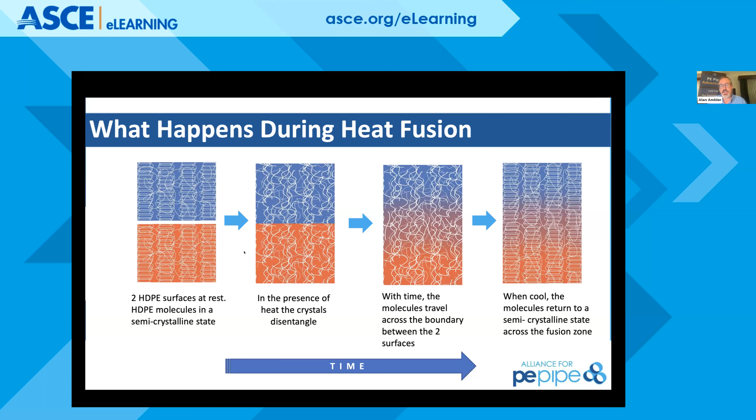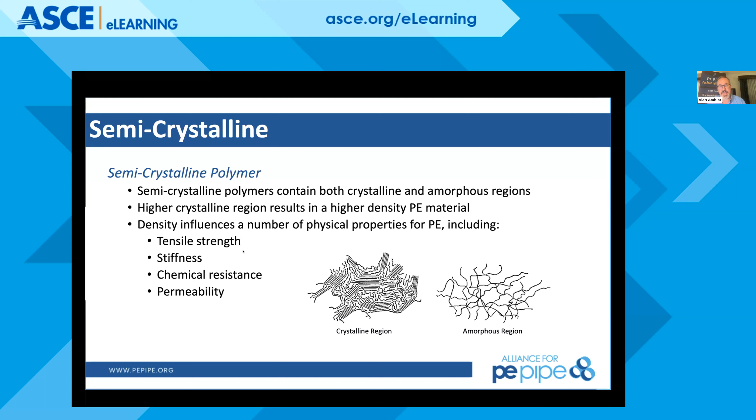That is unique to polyethylene in itself. Two regions I had mentioned before are the semi-crystalline and the amorphous region. Those two work together to bring us the density we need to give us a high pressure rating, to resist occasional and recurring surge pressures. It also gives us that amorphous region, which basically keeps all these parts and components together and really allows us that viscoelastic behavior to work with it in the field.

That's defined by two things: creep, or deformation of the actual material, and stress relaxation. Creep comes when we actually deform the material. High density polyethylene has high limits of deformation, but what we're seeing is once that stress is actually relieved from that point, then that pipe relaxes.

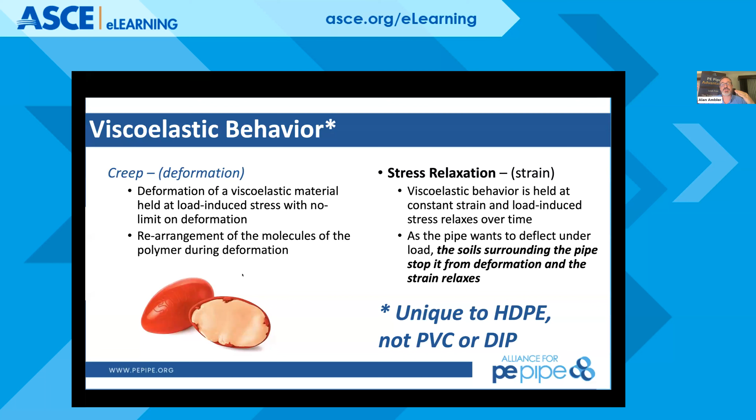That's why we can actually field bend this pipe in many instances. Once it's got a new shape as to what we're seeing, then we release that stress, and then that pipe thinks it's a happy pipe.

As you're seeing in some of these videos and pictures, the one on the bottom right happens to be a temporary condition where we are temporarily raising and elevating that pipe to get it aligned to go into an excavation or pipe bursting process. Once that pipe is installed, it relaxes and it's installed as a very happy pipe.

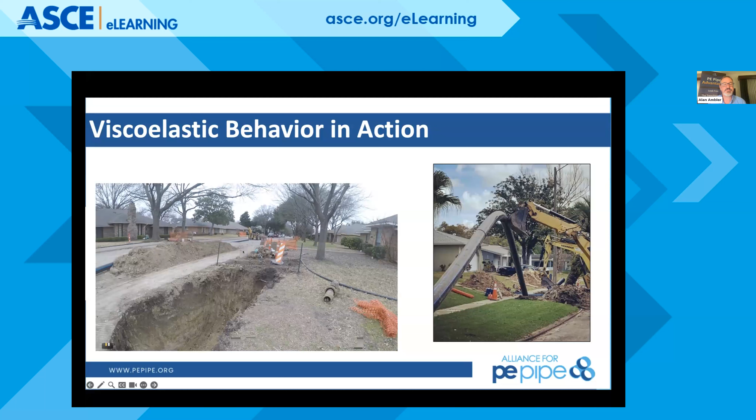So we want to look at main lines and open cuts. AWWA provides us an M55 design window. What that does is, if we stay within a 2 to 25 feet depth of installation, and we are DR7 through a DR21 pipe, you don't have to do any calculations whatsoever.

The video you're going to see now has all those things we want to see in a trench: a foundation, and a bedding that's a soft place to put the pipe down on. Then, though you won't see it in the video, they compact around that pipe as we go through.

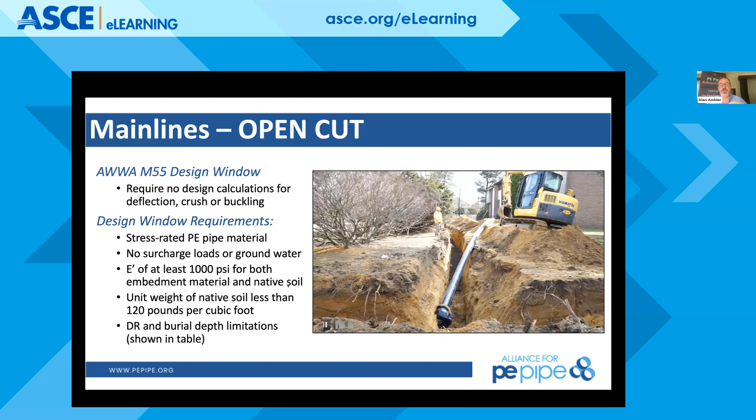This is one of the productivity benefits we see with long installation methods and open cut: we don't have to have people in the trench to work on that pipe as we go through, and we can take advantage of long laydown areas, or long installation areas, for higher productivity.

Horizontal directional drill is often a very common way for someone's first introduction to high density polyethylene. It's done in one of the most challenging conditions in which we're going to see HDPE installed. Oftentimes we're trying to clear an obstruction, either a riverbed, water body, or something of that nature.

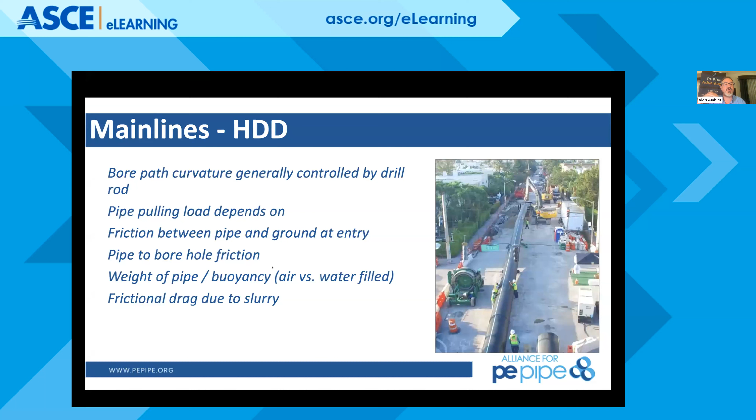In which case we go underneath that obstruction in a clear path, researching and designing that path as we come through. High density polyethylene allows us greater tensile force in order to resist the friction forces along that pull path as we go through and come out the other side successfully. That viscoelastic behavior again permeates all of this action as we're pulling this pipe into place.

Pipe bursting is another situation and trenchless design that really helps us to be able to eliminate more excavation as we go through.

We can all, as a trenchless family, go 85% less excavation. In pipe bursting, we're taking advantage of an existing conduit location. We know that it's free and clear of third-party utilities. We're able to come through and fracture that existing pipe. That existing pipe stays within the 2 to 3 inches of soil surrounding the replacement pipe, and now we're getting that production run as we come through.

We're limited in pipe length ranges by either valve to valve spacing in potable water distribution systems, or manhole to manhole spacing in gravity sewer systems, as we see there. So there are some limitations to the technology, but once we understand what those are, we can ensure productivity as it goes through.

Slip lining is another method. When we cannot fracture that existing pipe through pipe bursting, then we can pull in slip lining. So we need to access the pipe, and make sure that it's clear and free of any tuberculation or anything that might obstruct that gives us a nice avenue to be able to pull that pipe in.

Now, this is a replacement or rehab technology that reduces the ID of the existing pipe, so we can't put back something larger than that existing pipe. Pipe bursting is the only trenchless rehabilitation method that can replace with a larger OD than the existing pipeline. But in many instances, slip lining really helps when we have long runs and larger pipe, more of a transmission application.

Compressive fit slip lining is a very unique application for high density polyethylene, as we are temporarily reducing the OD of the production pipeline by pulling it through a die reducer. So we are pulling this HDPE pipe through that die reducer, and you're seeing here, once it gets to it, we're reducing the OD of that pipe, pulling it into place.

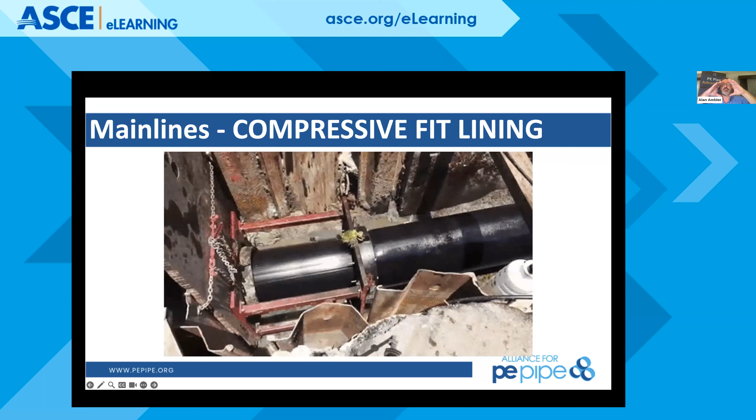Then when we're done with the pull, we allow it to relax, and it'll come back and retain its shape from the existing condition. So it'll push up forcibly against that existing pipeline as we go through. Compressive fit slip lining only uses high density polyethylene pipe, and it's a very cool technology to be able to maximize that ID as we've gone through.

So here's valves. One of the things I'd like to talk about, and Rusty, come on in if you want to talk through valves and available things that Core and Main might have. What you're seeing on the bottom right happens to be an MJ adapter.

Fusion in itself needs dry conditions. So if we have a repair or something that doesn't give us a dry condition, or there's just moisture we can't really get rid of within the trench from dewatering or over excavation stabilizing, that's where we would use this MJ adapter to make that connection.

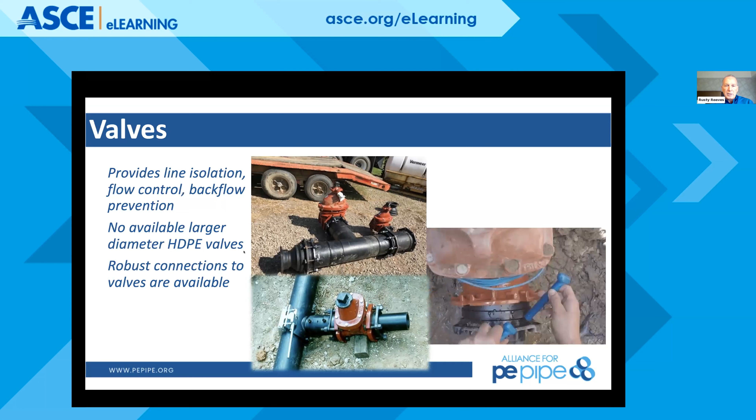But Core and Main offers lots of different valves and connections, and Rusty, maybe you want to elaborate a bit on that. Yeah, I was going to mention that. Like I said, I've been in this over 30 years, and there was a time it was difficult to find the right fittings that would work with polyethylene, and that is certainly not the case now.

There's multiple manufacturers of fittings. You can get hydrants with polyethylene stubs. I think if you can utilize the fusion method for all the polyethylene connections that you can, you get a better system. But however, we've got electrofusion available, and you've also got many different types of mechanical joining, just like you mentioned, the MJ. So you can really get anything that's required at this point in time.

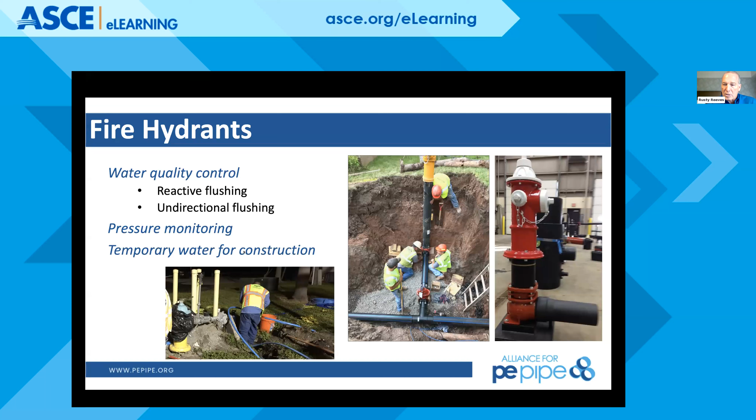Again, for flushing, for doing bypasses, I know a lot of the rental companies that help with temporary bypasses utilize the pipe. They drag it around on the ground because it's such a durable piping system, and you can do whatever type of valve configurations you need. These HDPE stubbed hydrants, like I mentioned, and there's now valves as well that you can just do the fusion directly in line. And again, you can always refuse a line if you need to.

Any type of connection, you see the photo on the right there where you can seal off, like in a manhole or wherever else. You can then come back in with grout and water protected there, so you've got that completely sealed off. The electrofusion, you can see there, it's a very small machine. You can drop down in ditches to do that, but you've got pretty much any valve available, and then you can get into the service lines as well.

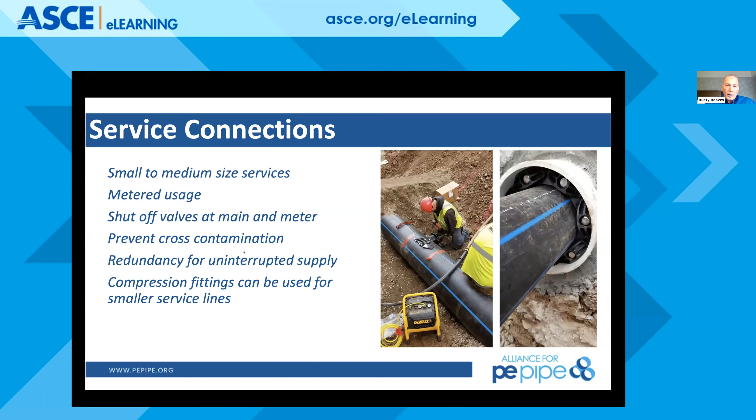Again, you can do butt fusion on that. You've also got electrofusion for doing your service fittings, or you can do a mechanical connection. Say you've got a little bit dirtier situation, a smaller area to clean off, utilize those mechanical connections for the service lines as well. Then you can tie right back into polyethylene, brass, or copper heading into the homes.

The pre-chlorinated lines for a lot of the system can take place as well. So here on the left, you see the electrofusion coupler, connecting to that service line. This one, you can do the hot taps on the right. You're able to go down and actually have that line in place, do your tap, and then make your fusion to the connection. You've got water flowing in just a very short amount of time to get to that service, to that house.

Dan, go ahead and go back to the previous slide for me. So in that service connection, most of the knowledge and application of high density polyethylene came, we learned a lot in natural gas, and medium density polyethylene. So we wanted everything to be fused from point A to point B. When we started to recommend, failure or leakage of natural gas has a very different implication than leakage within the water system.

So the industry in the past 10 years has come a long way, as Rusty had mentioned. Now we're making a lot of fittings that go with those standard brass inserts that you really want to use in corp stops, giving the municipalities a lot of different options. Glad you mentioned pre-chlorinated, Rusty, as Jared will talk about that quite a bit later, because they've implemented quite a bit of that going forward too.

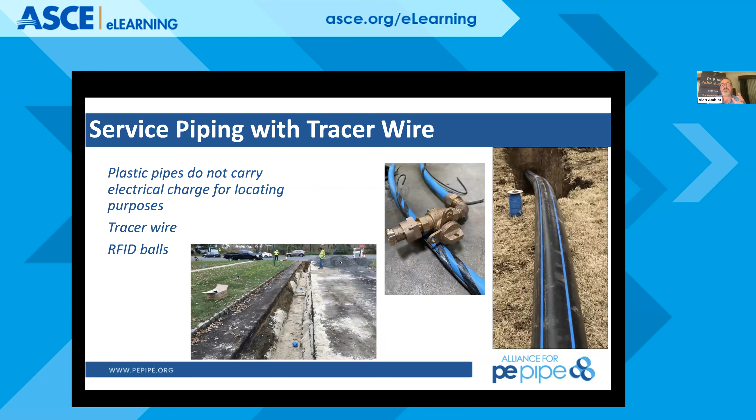There's also RFID balls, and those send a signal to the surface as to where that pipe is actually located. So any preferred option that you have out there for what it is that you want to do with HDPE is available to you, except for, of course, large fire hydrants or gate valves that have a lot of metallic pieces. But MJ adapters, or flange adapters, can attach to that fire hydrant and be able to carry on with your project as you're going through.

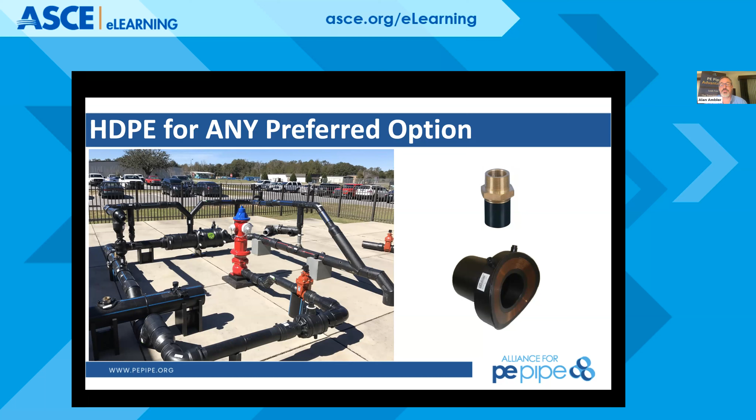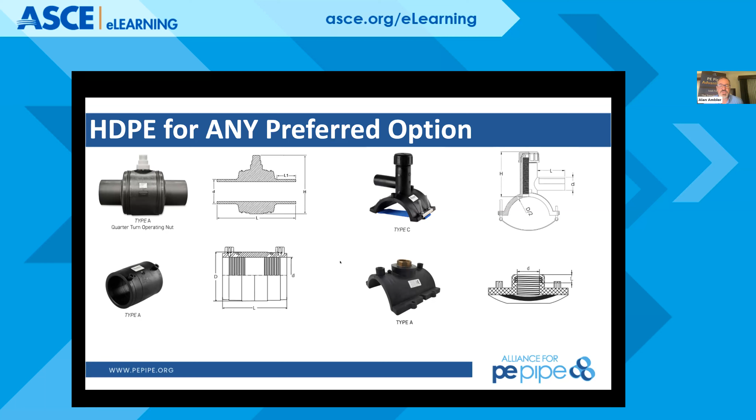So go ahead and fast forward. Here's some other examples of just cut sections. There's lots of products out there to be able to provide exactly what it is you need. And I believe we're getting to Jared pretty soon here, so we can dive right into that municipal story. Advance, Dan?

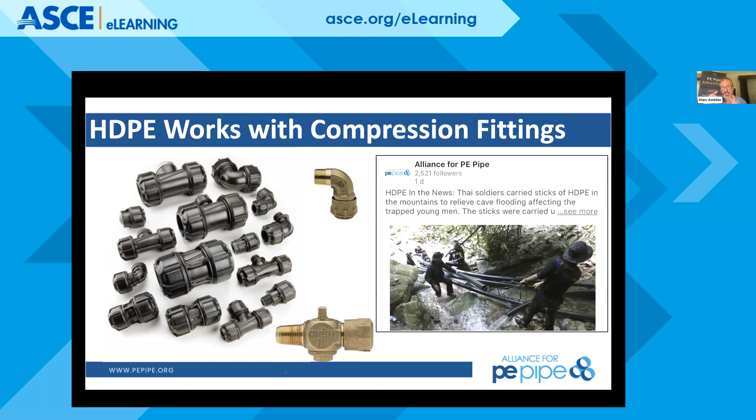Compression fittings are another example of how you can connect the services. Oftentimes in other pipe material types, like copper, you can use a compression fitting to attach to your service, or the next service down if you need to extend that service.

Come on and tell us about what's going on at the Metropolitan Utilities District, we're so happy to have you here. Yeah, thanks Alan. So I'm Jared Sfigera, Director of Infrastructure Integrity for the Metropolitan Utilities District here in Omaha, Nebraska.

The Metropolitan Utilities District, or MUD, is a public utility that serves the city of Omaha, Nebraska and surrounding towns. Our water service system is made up of 3 water treatment facilities serving over 600,000 customers through over 3,000 miles of water mains. Our water mains currently consist of mostly ductile and cast iron pipes.

MUD is also the gas company for Omaha and some surrounding cities, with nearly 3,000 miles of gas mains made up of mostly HDPE and steel pipe.

Since the topic of today's webinar is focused on our adoption of polyethylene, I wanted to open up with a bit of history of our use of that material at our utility. On the gas side, we've been installing HDPE for decades, but really increased with the advent of our Distribution Integrity Management Program and our program to replace cast iron infrastructure. HDPE on the water side has primarily been used for creek crossings, given its exceptional deflection capabilities, and we still use it for creek crossings for both water and gas today.

In 2016, we hired Murphy Pipeline Contractors to slip line a 24-inch cast iron main, which Alan showed earlier in some slides, with a 16-inch HDPE pipe in a very congested, high-profile corridor. Then in 2019, MUD formed an asset management division focused on reducing the cost of distribution water main replacement, having focused primarily on the gas side for many years.

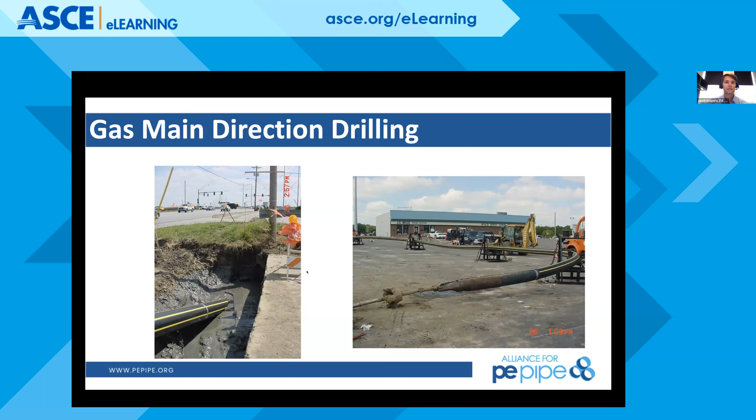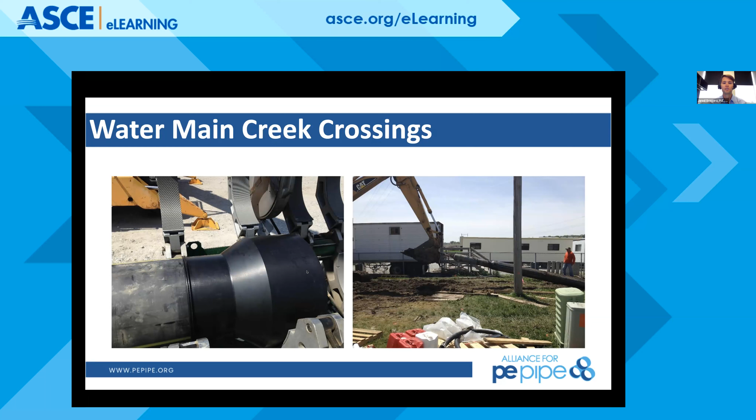I'm sure plenty of utilities have experience with HDPE creek crossings for water mains, but this is a somewhat unique scenario in that we had recently bored in that 12-inch IPS HDPE gas pipe that I showed on the previous slide. So rather than purchasing another pulling head for this 16-inch DIPS HDPE creek crossing, we commissioned a custom 12-inch IPS by 16-inch DIPS reducer to facilitate that pull.

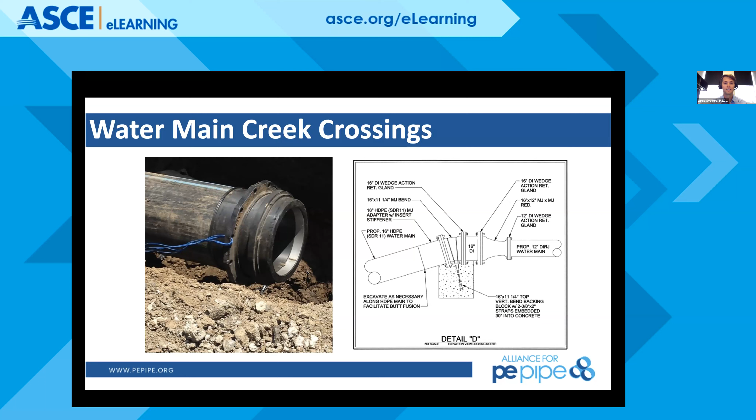The ability to create custom fittings with solid billet is a property unique to HDPE. For end connections for these larger water pipe projects, we use MJ adapters, as previously mentioned, to couple into that existing infrastructure. This project connected to a restrained joint ductile iron, so a collar for thermal expansion wasn't needed, but a typical thrust block was utilized to avoid movement when the valves on either side of the project were operated.

MUD has been installing ductile iron water mains using horizontal directional drilling for many years, but following numerous corrosion hole failures, we began installing more plastic pipe in 2019 or 2020. HDPE was only used along curved roads where the extra deflection capabilities could be fully exploited. However, over the years, more and more projects previously selected for PVC, those straight horizontal alignments, were switched to HDPE, given the ease of design and the fact that the pipe is very installer friendly. With HDPE, we no longer needed to produce profiles for our designs, given there are no vertical deflection concerns, and any field deflections that could reduce the life of a PVC main are no longer a concern.

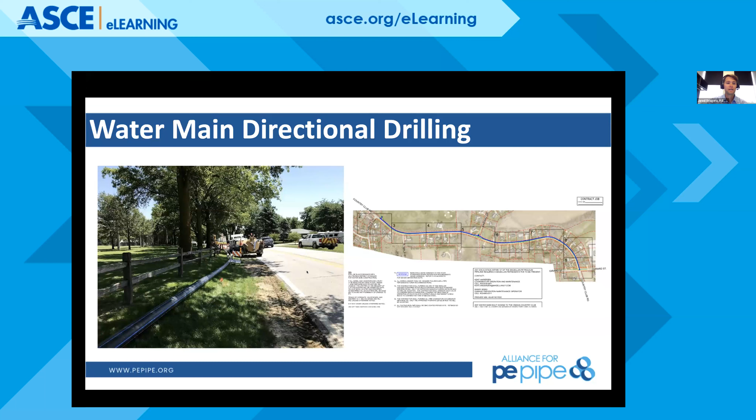In 2022, we entered into a contractor partnership with Murphy Pipeline Contractors.

Murphy is a nationwide contractor whose bread and butter is HDPE pipe bursting. We brought them in to replace some of the highest risk distribution water mains and see how their process would work in Omaha.

Now, the first step in a pipe bursting project is setting up that temporary water service. Murphy uses HDPE for that application as well. They use 2-inch HDPE above ground piping and set that up, and a service tap is installed down to the customer's existing service piping. This process has a lot less impact on the customers, since Murphy replaces those spoils right back into the holes prior to pipe bursting, making for a nice clean job site.

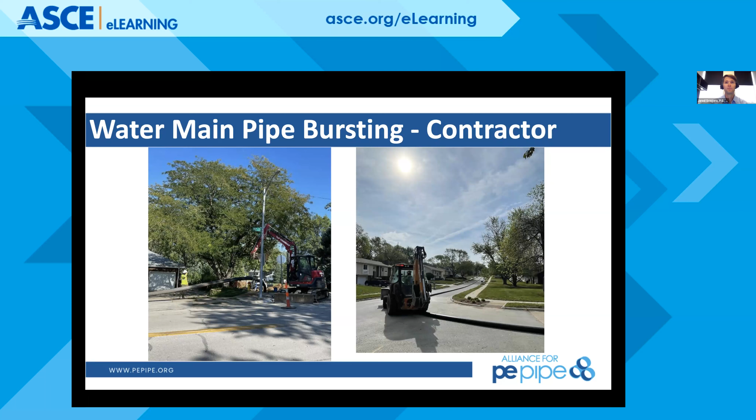The biggest challenge with HDPE pipe bursting is staging and transporting those long lengths of piping, so effective customer communication and traffic control is key. But Murphy tends to get creative when they move that pipe into the entrance pit. Typical burst only lasts a couple of hours, so disruptions to the community have been pretty minimal.

One of the biggest benefits of HDPE pipe bursting is the ability to pre-chlorinate and pressure test those pipe sections above ground. Murphy plans out that entire project ahead of time and labels each length of HDPE. Each length is then pressure tested and disinfected days prior to installation, and after the pipe is installed, the end connections are made to the existing system.

We choose to keep that area isolated and pull additional bacT samples. It just has an added assurance of pipe cleanliness, but service connections can be made that day. This avoids costly days of waiting for mains to pass bacT testing before the project can progress. I worked closely with Murphy to develop a custom project log for our projects to ensure the testing procedures adhere to our standards, and an MUD representative has always been on site to witness that testing.

Jared, it's Peter here. I noticed that you mentioned you used cost as a major determining factor in selecting polyethylene, as well as its deflection ability. Have you developed an average lineal foot cost for your pipe bursting jobs?

So we kind of deal more in cost per mile, and I can share that with people if they wanted to reach out. But yeah, it's definitely been a cheaper option for us in the long run. So it's less expensive for you than open cut with PVC? Absolutely, yep.

Thank you. But Jared, if I can interrupt, let's go back to the pre-chlorination. One of the things I wanted to point out is because we can fuse that really long run above ground, we're taking advantage of higher productivity the day of the pipe burst, right?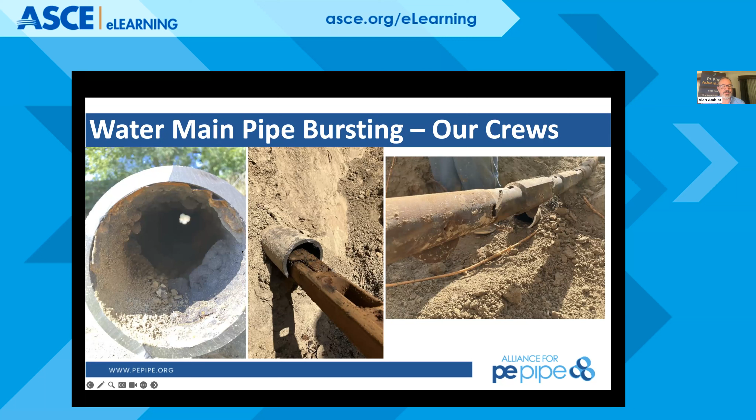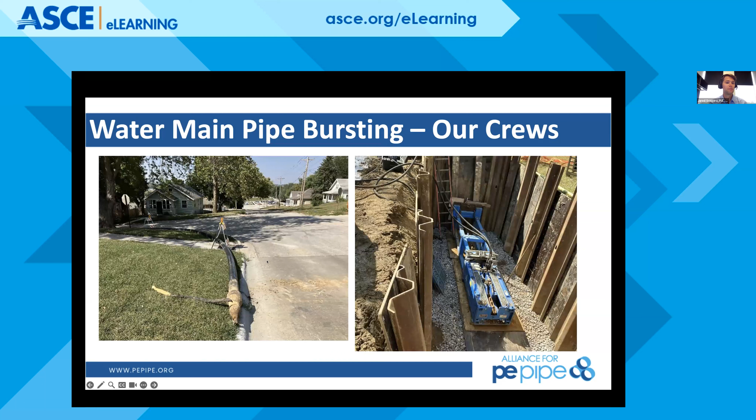After the rods are in place, we move that pipe string to the pit and use our Grundoburst 800G, purchased last year from TT Technologies, to pull the new pipe into place.

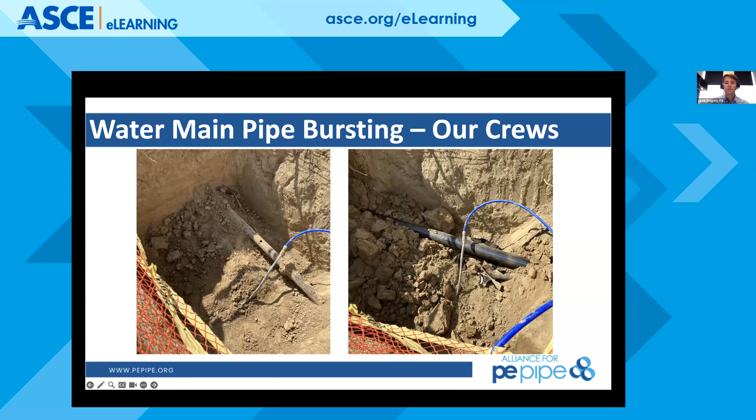We also pull pipe burst specific trace wire made by Copperhead, and that's just under the pipe in the right photo, so it's not visible.

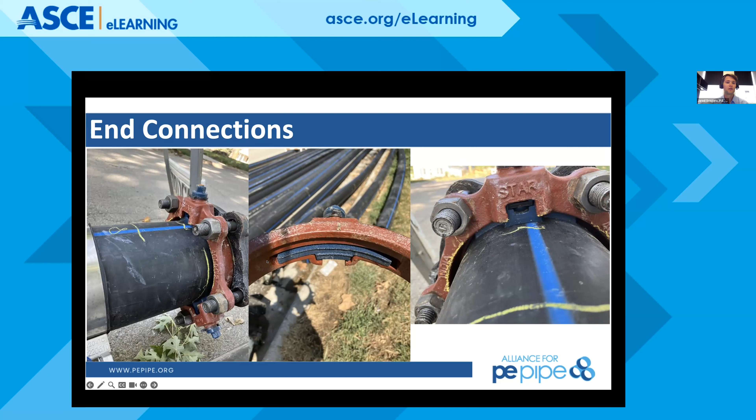For end connections on these smaller diameter water projects, we elect to use mechanical joint wedge action retainer glands made specifically for plastic pipe, along with an insert stiffener. We've found this to be a fast, effective, and flexible means of connecting to existing restrained infrastructure. But when we connect to unrestrained systems, we install a concrete collar or block with electrofusion flex restraints to resist any pull-out forces.

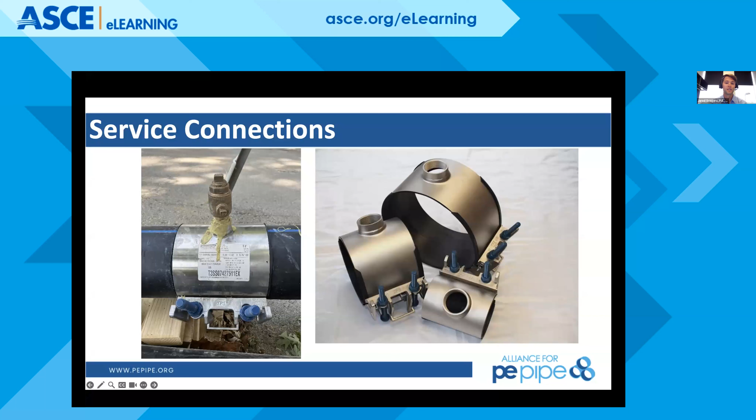Wrapping up, I wanted to show the saddles we use for service connections. We elect to use mechanical saddles, and have found that the TPS triple tap saddle is the best for pipe bursting applications. This saddle is made of 304 stainless steel and features 3 independent sealing surfaces for any imperfections in the main following install, and also allows for thermal expansion and contraction.

Thanks. Jared, great job. I really enjoyed learning about what's going on in Omaha and the surrounding communities. Thank you very much for that.

Alan, I noticed Jared has gone with a mechanical connection on his services, which you did too when you were running a utility. Could you give us what we consider the best practice for polyethylene, to keep everything fused all the way to the house?

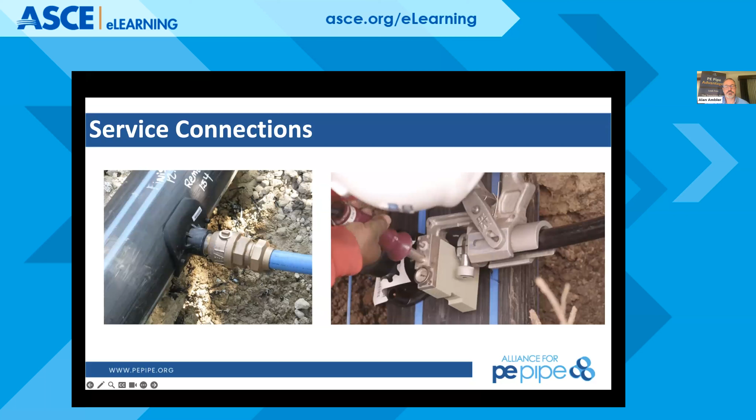And in the previous one, Dan had an electrofusion tapping saddle, versus the other one with the self-tapping tee, Alan. But with that, the owner doesn't get the benefit of a corporation. Could you explain why a utility would choose not to have a corporation?

Whether or not they need a live tapping condition at the main drives a lot of that decision, especially if they can't shut off the water main they've installed. In scenarios where you have an installed water main and come back later to install a new connection, you want to keep that main running as best you can. You'd use live tapping, then a corporation stop to stop flow through your service pipeline as needed. Later down the run, they may have installed a different stop at the meter box to shut water off there. There are lots of different options, and that's one of the things we wanted to convey thoroughly.

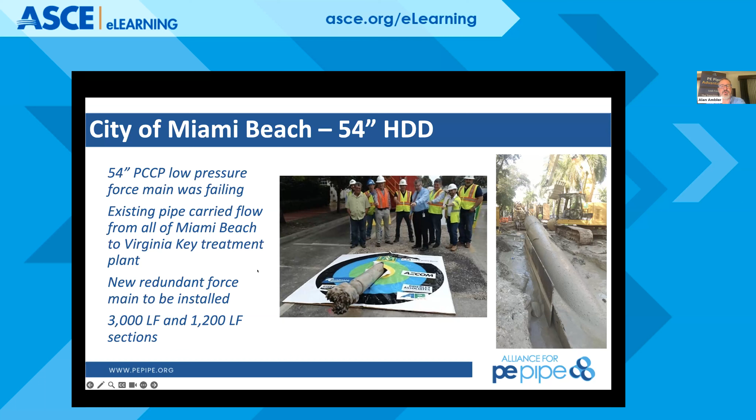The project was originally bid as a micro tunneling project, then exceeded its budget and came back as a project pushing the boundaries for horizontal directional drilling - 4,200 feet in a heavily dense area. They basically took over an entire city street for a while, shutting it down from through traffic to fuse up the long runs of pipe.

There was a break in the pipe where they could not pull it all in one section, and had to stop the pulling process to fuse the pipe to continue. The whole project was executed in 5 weeks, and the actual pulling process was significantly shorter than that, minimizing impact to residents and customers viewing the area - another massive social savings to install this pipeline quickly and minimize impact to people.

Kiowa Special Utility District also used pipe bursting of asbestos cement pipe to replace existing pipe. In previous projects, they've also installed high density polyethylene through horizontal directional drill to replace existing pipe they've had - essentially installing a new pipeline and abandoning the old one.

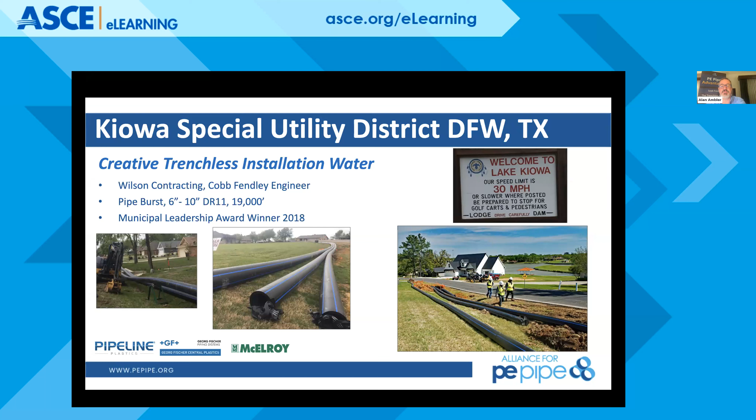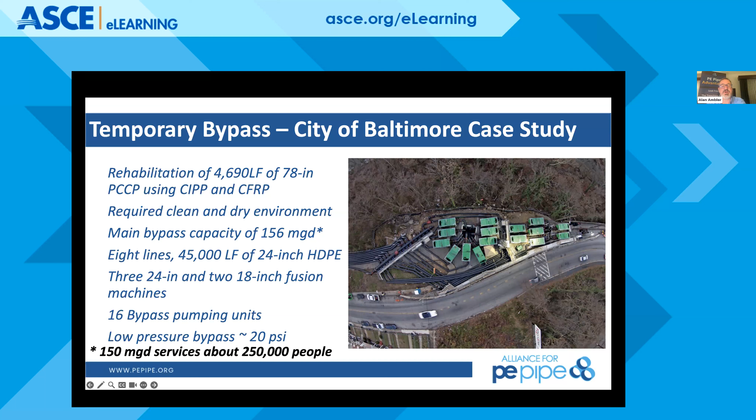Because it's a combined sewer, they understand the gravity flow through this pipeline, but also need capacity for potential rainfall events. To line 78 inches, almost 4,700 linear feet of that pre-stressed concrete cylinder pipe, they needed 45,000 linear feet of 24-inch HDPE. You can see how many different bypassing units they really had - this is a very robust, large pipeline serving about 250,000 people in the City of Baltimore, and high density polyethylene was used heavily to bring us through this.

You'll see in this video lots of different ways to handle and fuse that high density polyethylene. That's a common manifold that all of these bypass lines suck into and dump into. The crew on site just ensures productivity by continuing the fusion process, making sure we get as much pipe fused as quickly as we possibly can.

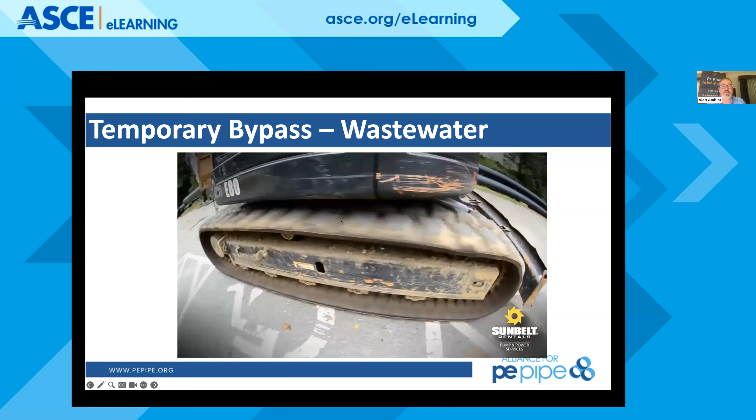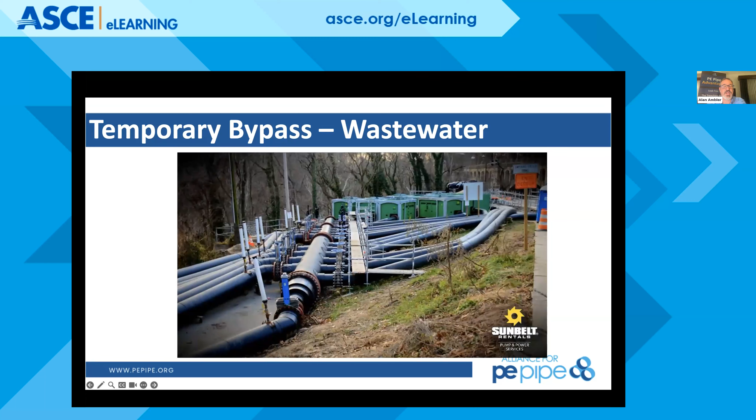It's stored above ground through the actual lining process, and we're protecting that pipe in different areas. This video really shows a good culmination of lots of different methods to connect that high density polyethylene - benefits of fusion, fabricated fittings, flange fittings, and lots of different ways to help through a very complicated process. Oftentimes in large diameter rehabilitation projects, the temporary bypass can be significantly more complicated than the actual rehab of that large diameter process itself.

Again, when we look for temporary water or potable water bypass, sometimes these are obviously much smaller, but we still have to protect that line, as you're seeing in the bottom right picture. We have basically a protection over it so cars don't drag across that line as we come through.

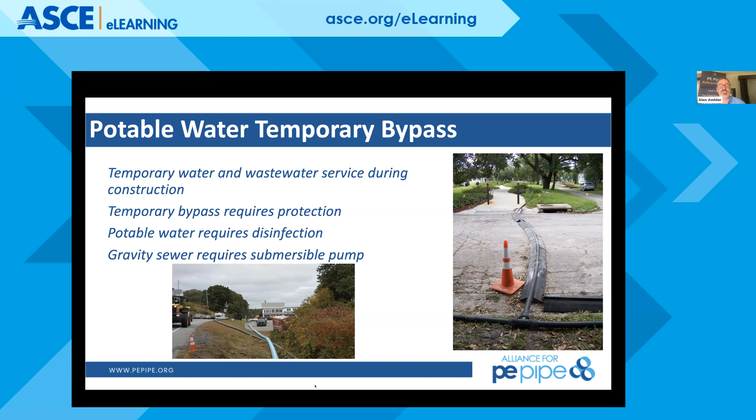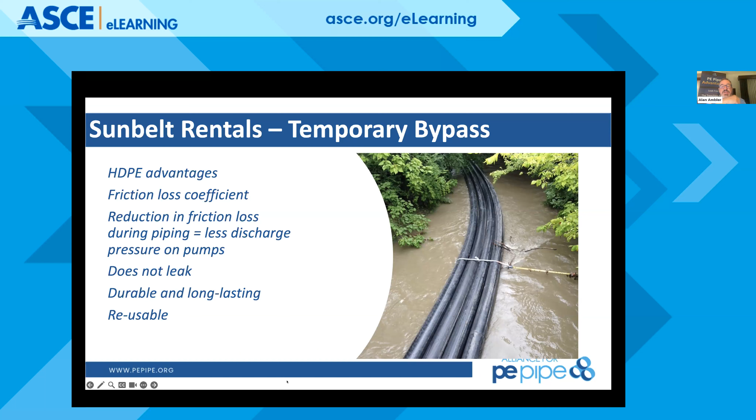It's fairly common to use a temporary bypass, a 2-inch line of high density polyethylene, and then move it from one block to the next as a project continues. Here's a unique application for Sunbelt: they draped the high density polyethylene bypass through a live river. A leak-free joint is the only product that could offer us this opportunity to not pollute that river. The friction loss coefficient is maintained as we go through. These pipes do not leak, and temporary bypass companies continue to use and reuse them all the time. That thermoplastic behavior, which allows us to continuously fuse the pipe, cut it, and fuse it again, is a true benefit in temporary bypass.

So Rusty, do you want to talk a little about the Westminster Force Main project that installed new force mains to help an existing force main? Sure. I think this project, as well as the North Texas project and the bypass we just looked at, really shows some of the advantages of polyethylene.

On this next slide, we've got dual pipelines going through a very trafficky corridor, same as that North Texas HDD job shown before. You've got to keep these traffic lanes open. Along the coast in California, you don't have room to close these roads down, and they're able to do this very quickly, getting one trench with 2 or 3 pipelines in there at a time. Polyethylene being able to fuse beforehand makes it so much easier. Like you mentioned on the Miami job, you're able to do a very large project that, had it been open cut, may have taken months and shut down those roads for months and months. They're doing these things in 5 weeks. Polyethylene is just amazing to be able to do that.

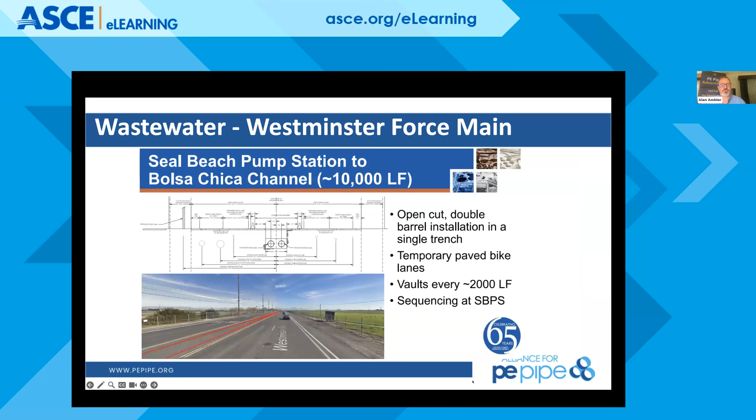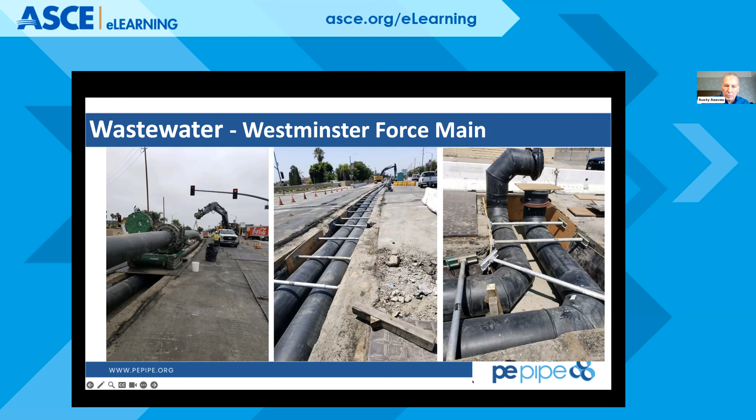One of the things about open cut - let's go to where we see the trench cross section. Essentially, when we have room to open up, once we're able to take over that median, we can open up that long length, and they can just open up that entire section. If everything was fused before, they can pull this in an hour, so we're talking about maximum productivity. We often get that question about open trench because everybody's used to segmental pipe and limited trench excavation ability. That's really controlled by maintenance of traffic activities more so than the actual logistics of digging trench and having a trench box through it. So less excavation, as well as not having a person down in that trench, which you have to do with segmented and gasketed material. Polyethylene, being a monolithic pipeline, gives you a lot of advantages for these projects, for sure.

Go ahead and advance to the Belgrave project, Dan, and Richard, if you wanted to come on to talk to us about this project - I know you were involved in this one. Are you still with us, Richard? Yes, I'm still with you. How are you doing? Thanks again for a lot of the great questions coming in about Belgrave. I was just referencing this to a question.

What's the difference in how frequently you can test large diameter fusions? In this particular case, we had some real challenges because we didn't have a lot of area to work with to make the initial string of pipe, and this was 30-inch diameter.

So we did it on barges, and we used the waterways there to support that string of pipe that we were drilling back. We also had a wetland that we had to go underneath that could not be touched. We were observed very stringently by groups concerned that the wetland was going to be affected, and we drilled back underneath it. It really created a great opportunity to get this line done and make sure that this force main could be attached to that new facility. So it was a big challenge, but we managed to get it done. For the testing of large diameter pipe, we sent smaller samples to the barges, and every morning they would test the process and look at the joint integrity by destructive testing to make sure the fusion process was working well, because once we knew we were putting this pipe in, it would be very difficult to get out.

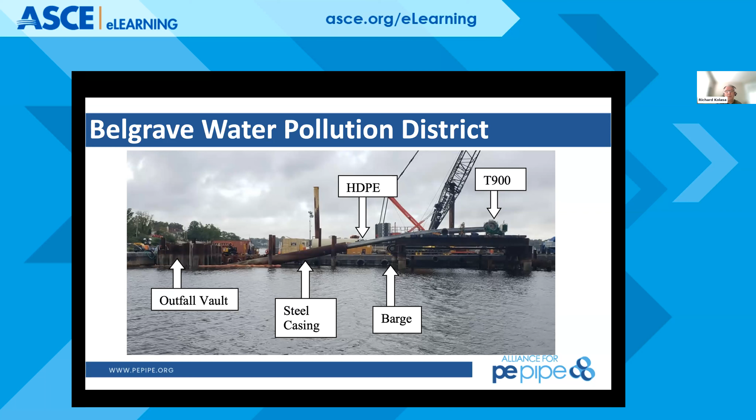Go ahead and advance. There you go. Yeah, there it is - that's the outfall box or vault. What they did is cut off that outfall tube or insertion tube, and then sealed that up, and then the valves were put in because the valves needed to be below a certain level so you wouldn't get any sediment or disturbance of the water around that outfall box.

And then this was the last component of the two pulls, one line connection to the plant, and then of course the other side's there, which was the fabricated fitting that was fused on to complete that run. So the sweep on that fabricated fitting had to be properly designed and then sent to the fab shop. Is that right, Richard? Yeah, that's correct. We actually put the pipes in first, then provided the measurements to the fab shop to get that custom sweep done.